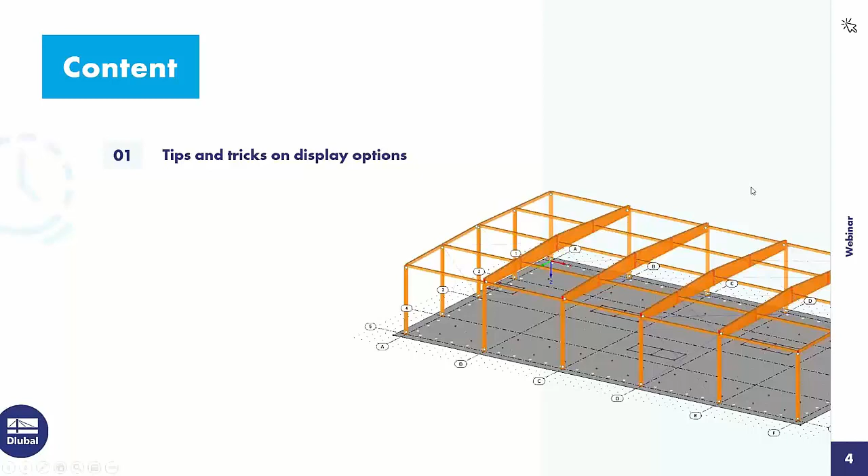To the agenda today, I will introduce some tips and tricks on display options, also on the printout report, also basic information. I do a single and multiple print of graphics to the printout report. And I show how to create a verifiable printout report.

We turn directly to the program. RFEM, that's a storage building made of timber and a reinforced concrete floor slab. Bracings from steel, you can see around. The model is completed, it's designed, the timber structure is designed, and also the concrete structure.

We can go through the load cases, self-weight with roof loads and single loads from racks, snow load, the imposed loads with loads from forklifts and from the racks. Wind in X direction, Y direction. Imperfections in X direction and Y direction.

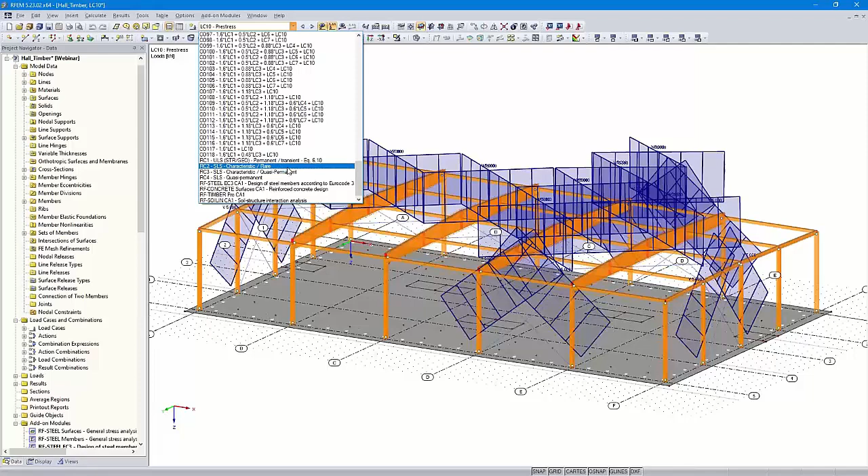Pre-stress. And then there are a lot of load combinations that are automatically created by the program. Also four result combinations, 1 for the ultimate limit state design, 3 for the serviceability limit state design, then the design of the steel structure. Those are only the bracings. You can see a design ratio of 55%.

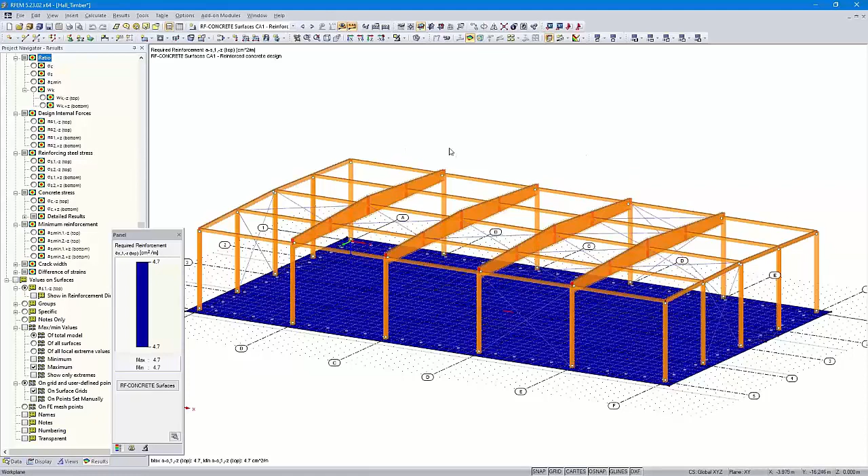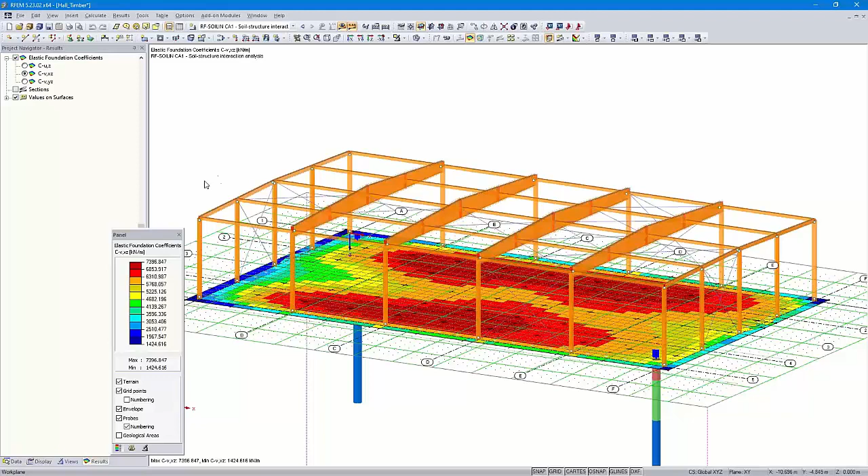Then the concrete results, also for the floor slab. Then the results of the timber design. Here you can see a design ratio of 94%. That's in the horizontal beam here, the maximum design ratio. Then I used RF-SOILIN to determine the elastic foundation coefficients. But we want to start with the member results. We want to print them in the printout report.

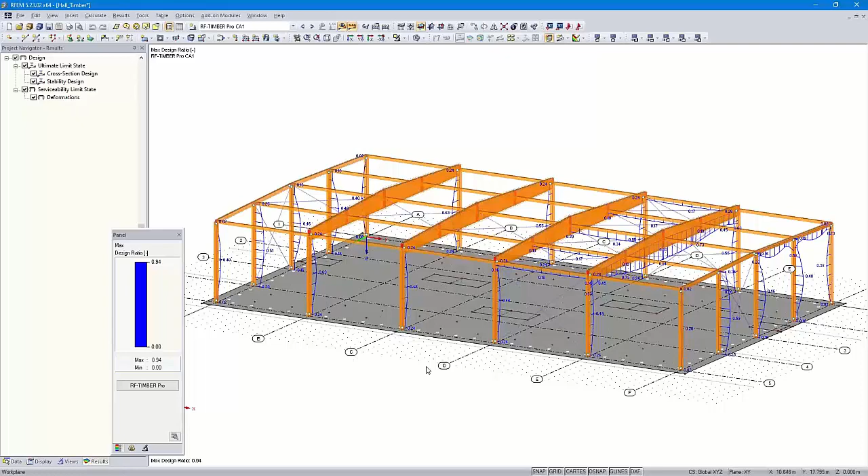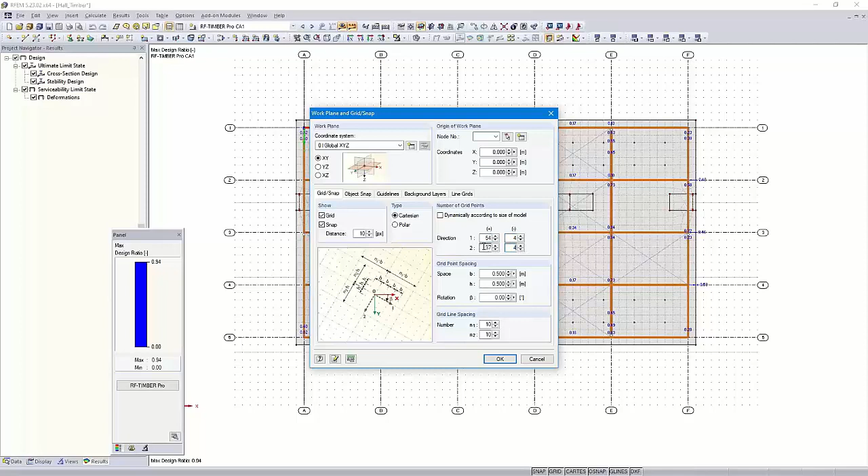But at first, I would like to move the axis designations closer to the model. How to do that, I can show you maybe in the top view. We go here with a right click in the grid options, edit. And then here is checked dynamically according to size of model. We uncheck it and then I subtract here 5. Okay, and then you can see the axis designations are

closer to the model. Okay, you can also hide the axis in the display navigator under here, guide objects, and then you can uncheck the guidelines and the axis would be hidden, but we would like to show them and document them.

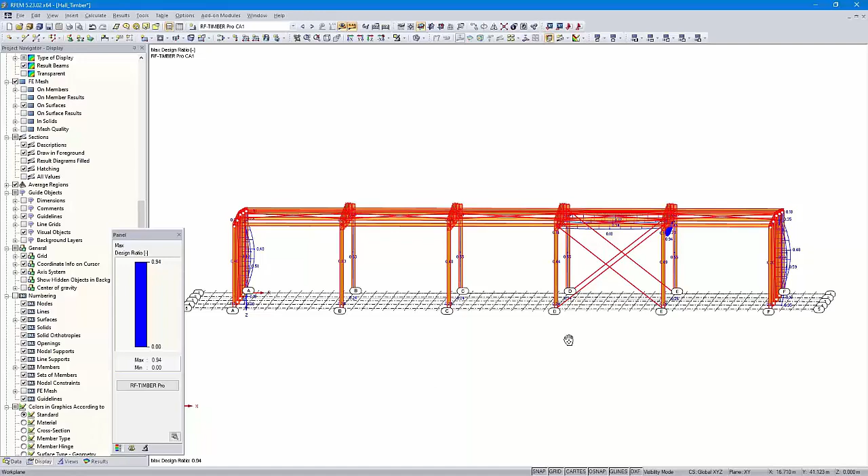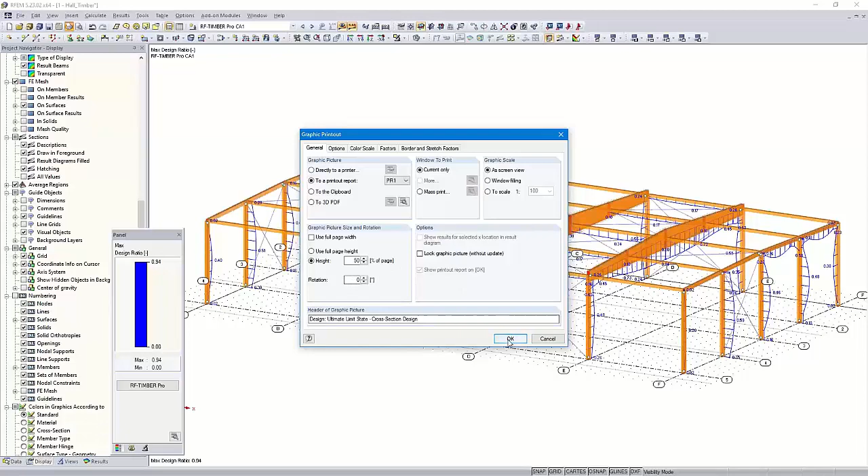Okay, then I make only the timber structure and the steel structure visible with that option, visibility by selected objects, and the concrete floor slab is hidden. Okay, let's print that graphic in the printout report. Here above, print graphic to the printout report, the current only as screen view, that's the options I will use. Then the height, 50% of the page, no rotation, and I confirm that.

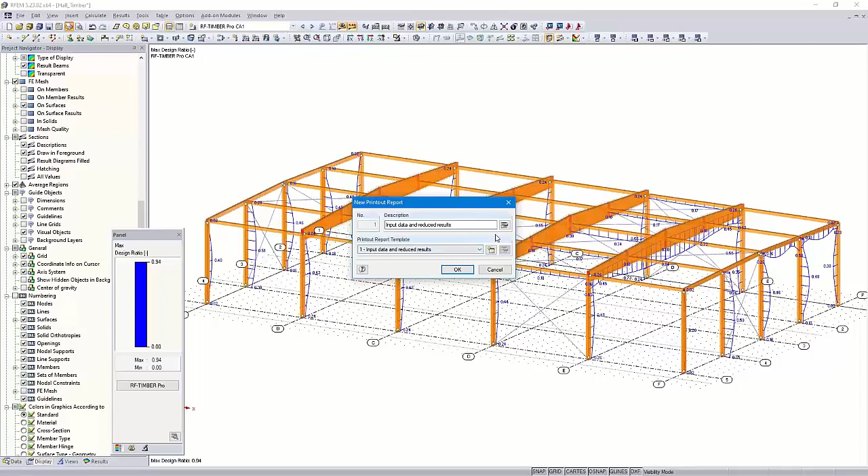So usually we would print the graphic with this option here for the printout report, input data and reduced results. But you can also use other options. But in that case, I would like to disable a lot of pages because we want to print the graphics firstly in an almost empty protocol or in a protocol with not so many pages, and therefore I disable here the RFEM data, the RF-STEEL data. I leave the concrete and timber data because we would like to print graphics in those chapters.

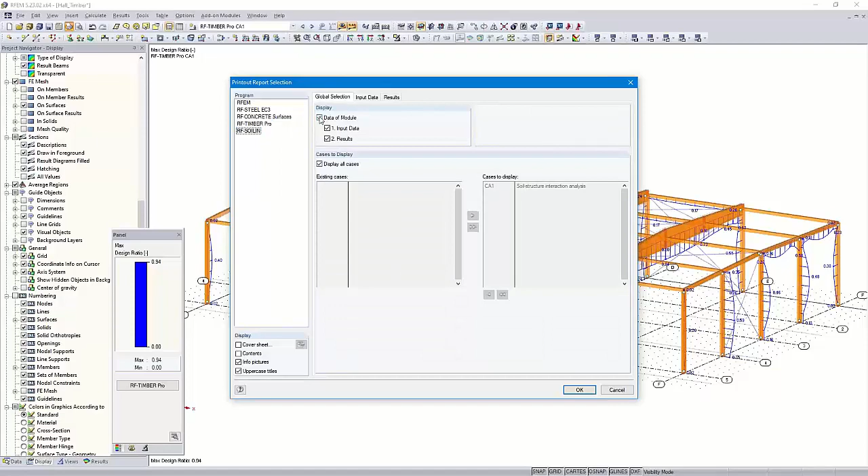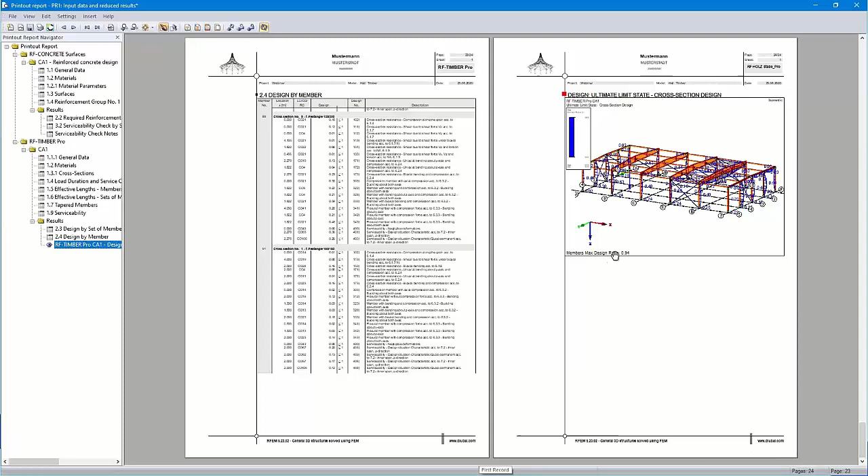Okay. So, and now a printout report with only few pages is created. At the end, we will have more than 170 pages. Now there are only 24, and the handling of the graphics is much better. Okay, but we can see that graphic is quite confusing, but we can modify that afterwards.

By right click, I can open the properties and I can rotate the graphic. At first I use the full page height and rotate the graphic 90 degrees. Okay, quite better, but I'm not satisfied with this graphic. I will change it here with right click and edit.

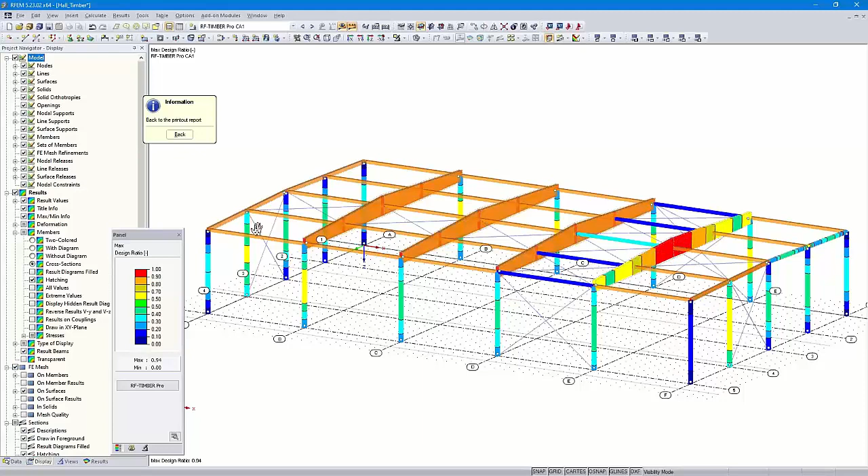I go back to RFEM, and then I can set in the display navigator under results, members, here the option two-colored, that's the current state. Then with diagram, it's colored here. Then without diagram, and cross sections. I think that's a good overview. You can see the maximum design ratio is in the horizontal beam here, and I can go back to the printout report.

Okay, that graphic is much better. We will use it, and we would like to print that graphic of the axis E separately in the printout report. We leave the printout report with saving that graphic.

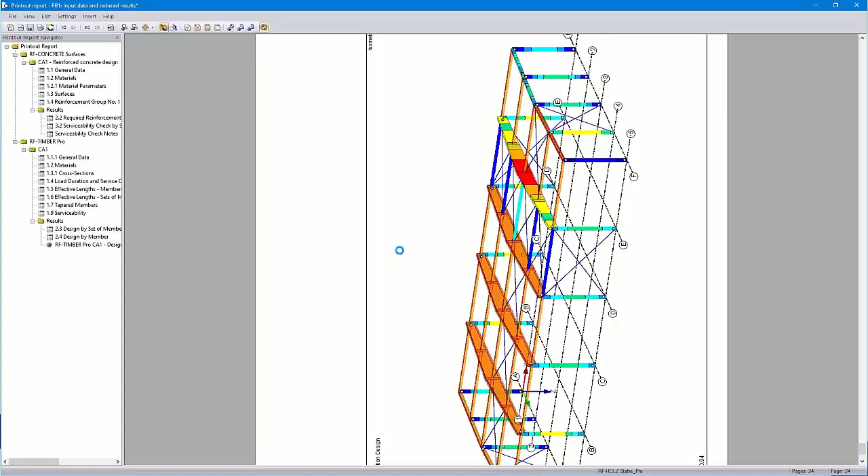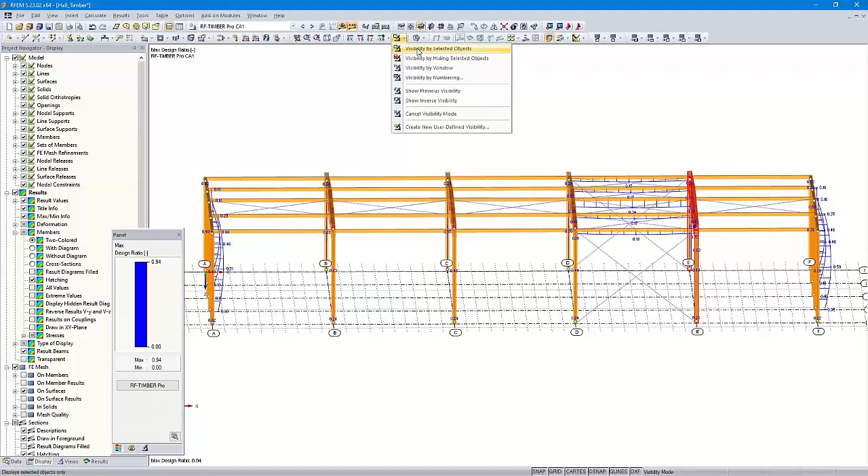Then I create a new visibility. I use this time this option here. It's the same as when I click on the right mouse key, visibility by selected objects. I use the wireframe display model,

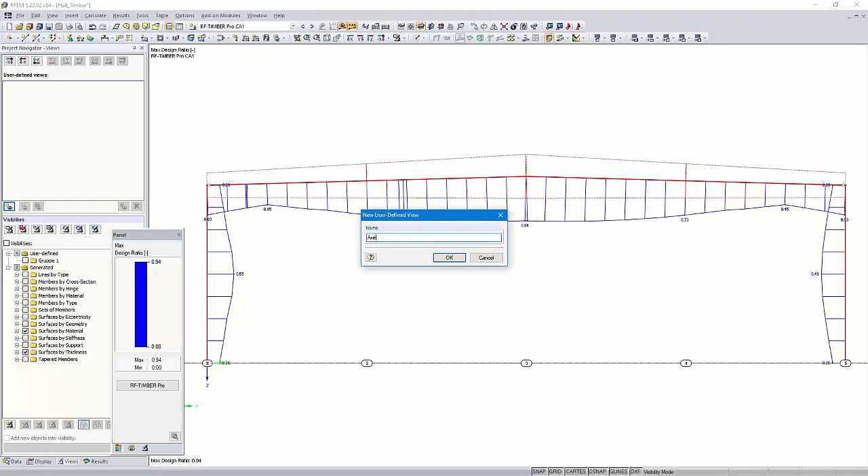and we can create a view, for example, here, create new user-defined view. I can call it axis E. Okay, and you can go back easily later to this graphic.

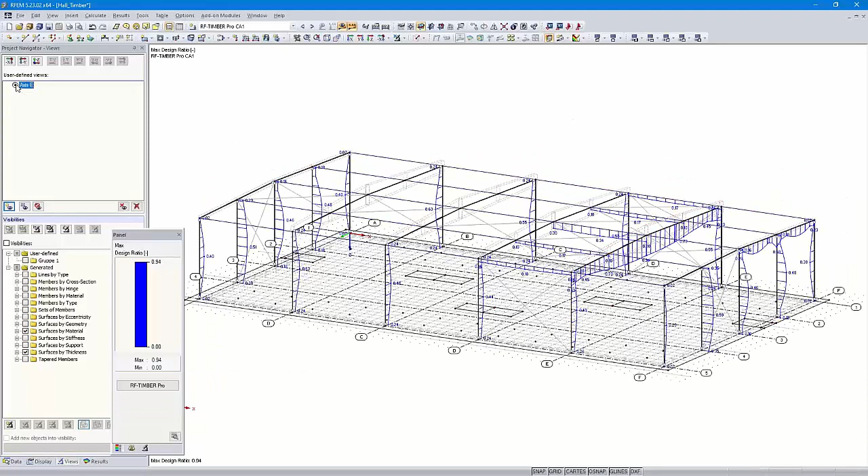I can show you. I cancel the visibility mode. For example, this view, and I click here to axis E and come back to this graphic. Okay, here you can see the 94% design ratio. We print that graphic. That's quite easy now.

So now also that graphic is created. Yeah, it's quite sufficient. I could make the panel smaller here with properties. I can use a color scale width of 20%. Okay. Okay, that looks better. I could move that to the right side a little bit, but I don't do that.

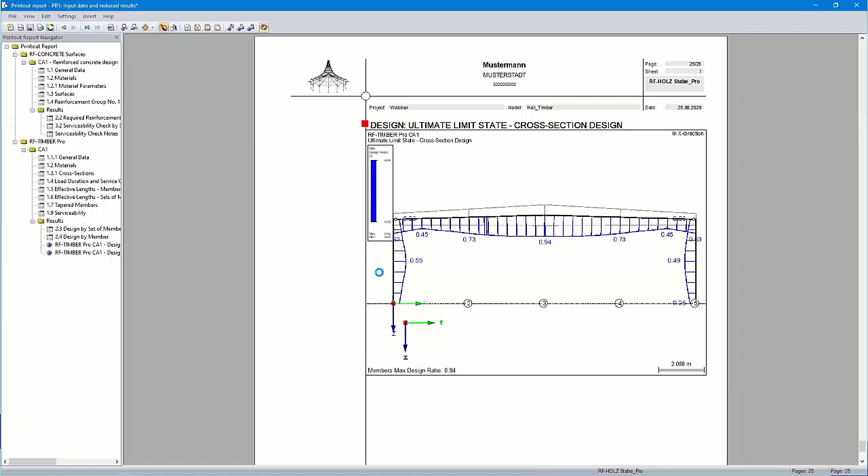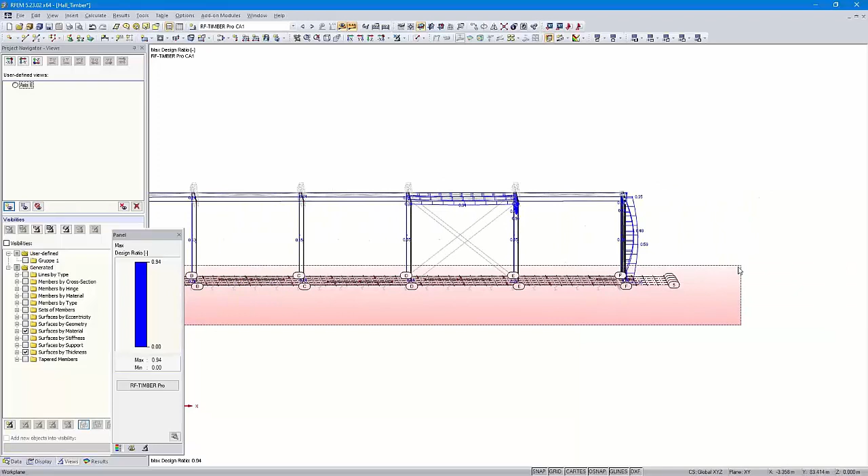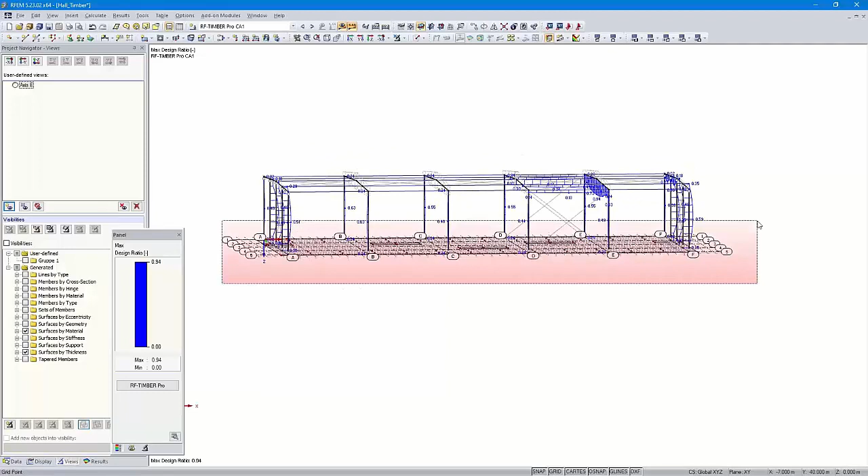We leave the protocol with saving the graphics. And then we print the reinforcement results. Okay. I choose only the concrete floor slab in the view. Just a moment. Okay. So, a view in Z direction.

A small tip: when you zoom in and out in a graphic with the mouse wheel, you can see steps. If you want to zoom in and out without steps, you can press the Shift key and the middle mouse key, and then move the mouse back and forward, and you can zoom in and zoom out continuously. Okay, just a small tip.

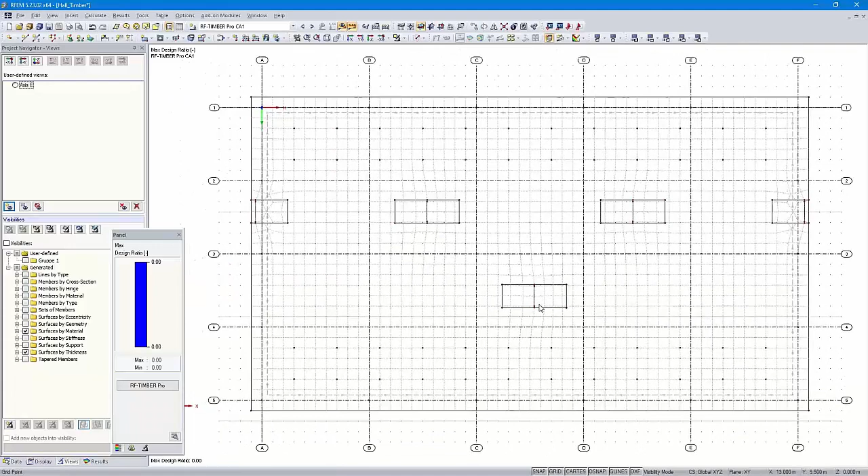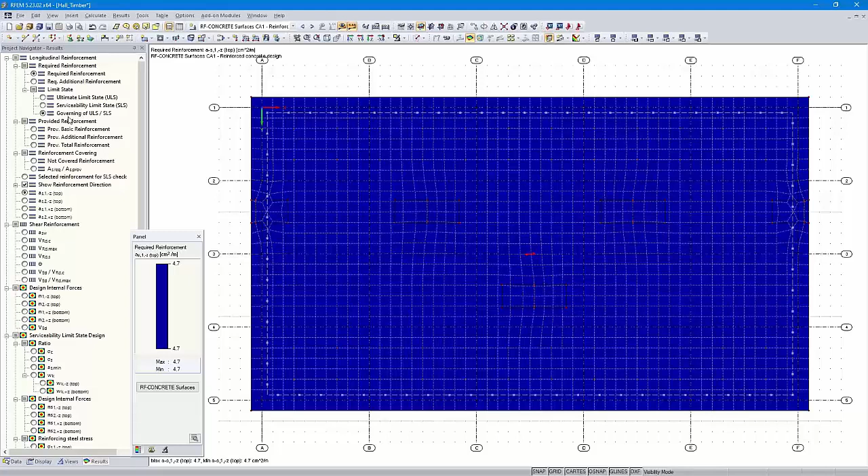Then we go to concrete surfaces and the results. Those are the required results governing of ultimate limit state and serviceability limit state. You can see there are almost the same values in the concrete floor slab because of the restrained design.

I use in this webinar the graphic of the ultimate limit state design. The graphic has more different values. You can see here the values between 0 and 2.7 and 0 and 2.8. Those graphics are more informative. Okay, I could print that graphic. That would be absolutely sufficient.

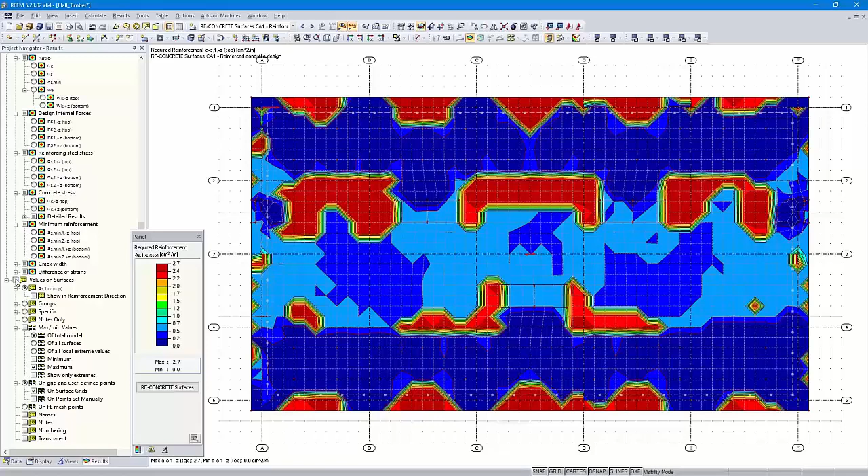But I would like to do a task that is more difficult. I would like to print a graphic with all values in all grid points. I check here values on surfaces, on grid and user-defined points. And when I have got here all values, I can use here not the ISO bands, but the ISO lines.

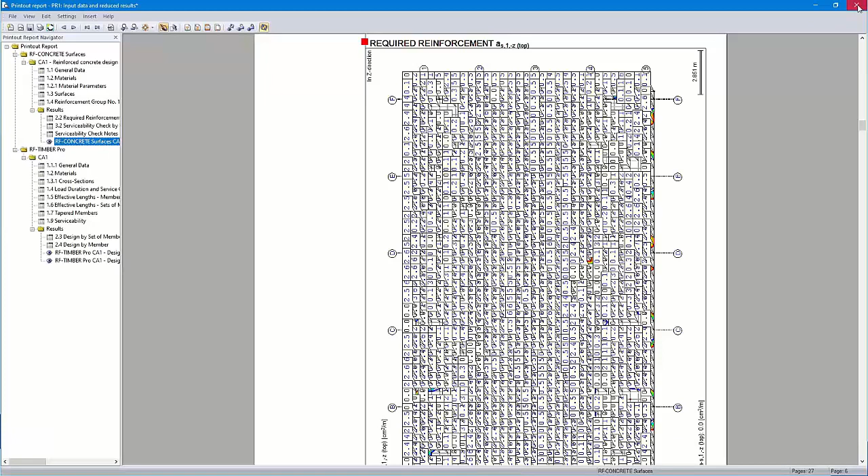And then I test the print. I print the graphic. I use the full page height and rotate it 90 degrees, and we will see how it looks. Now we can see the values are too large. The graphic is quite confusing, and we leave the protocol without saving.

By right-click at one value, we can open the display properties, and we are in the right place here, result values on surfaces. We can change the settings here separately for the screen and the printout report, but we can also use identical settings for both. We change only the setting for the printout report.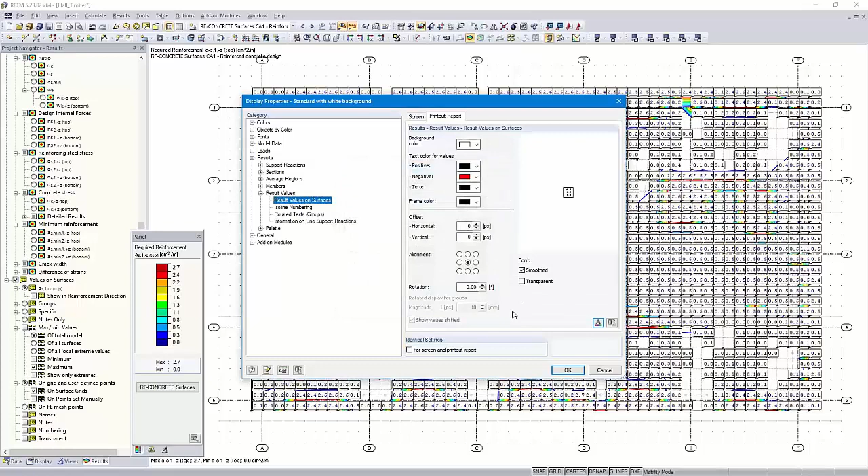I use here for the values the black color. Then I delete the arrow here. Then I move the values in the middle of the grid point, and I change the font size to 4. That's in German because my Windows is in German, but it doesn't matter. So, okay.

And then we print it again. Same settings. And just a moment, and then we will see that it looks now much better.

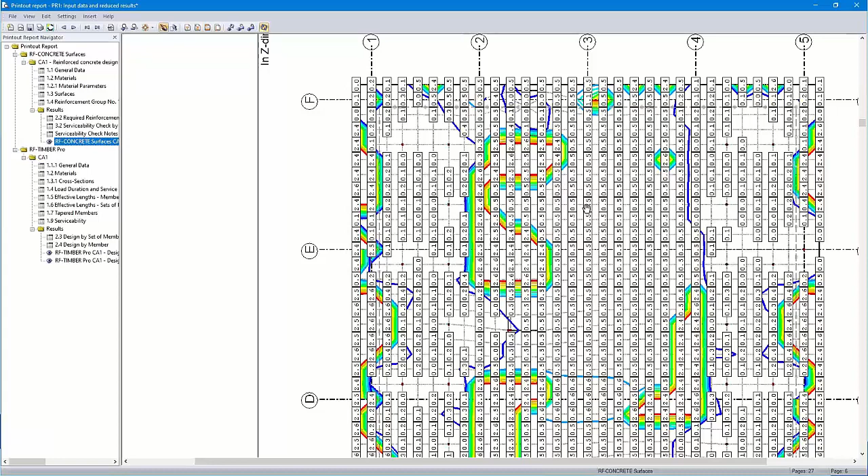Yeah, now we can read all the values here. At least for a PDF print, it would be absolutely okay. Then we leave the printout report because I would like to show you a mass print only for 4 pages for the 2 directions here, and for the top and the bottom, meaning the reinforcement.

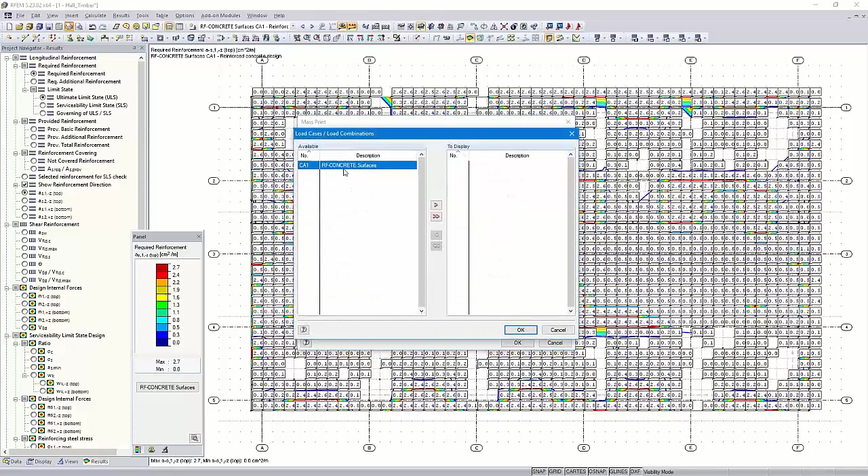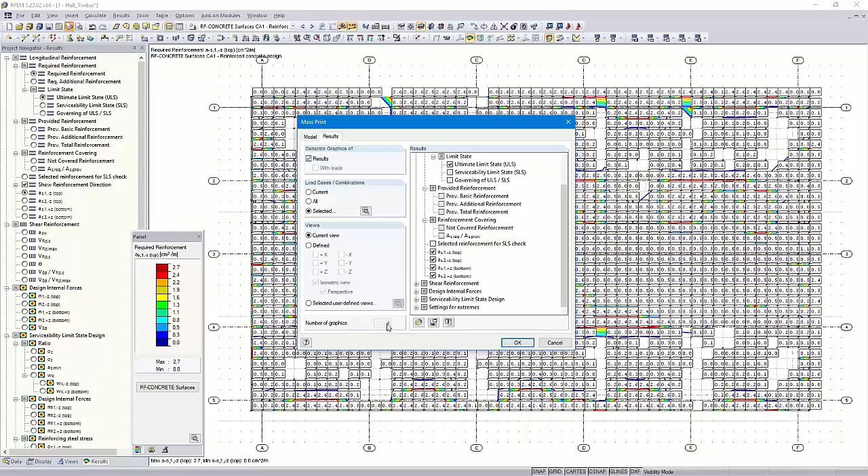I go here to print again and choose mass print. I change the mass print settings and I select the concrete surfaces, module data, choose ultimate limit state design and AS1, AS2 for the top and both for the bottom. I could also add other graphics, but for this example, 4 pages or 4 graphics are sufficient. You can do that the same way if you want to print more graphics.

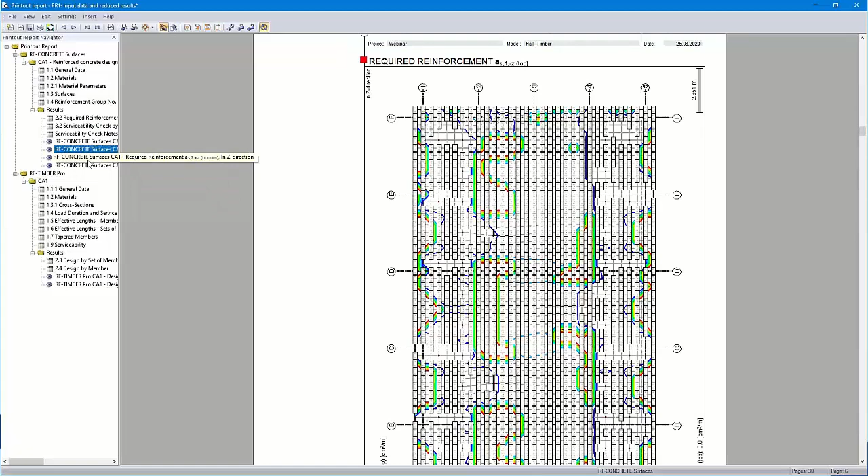The mass print works for member graphics or graphics with member results as well, but I would like to show you the function for the surface results. Okay, just a moment, and then all graphics are visible. I click our graphics here. You can see it's okay.

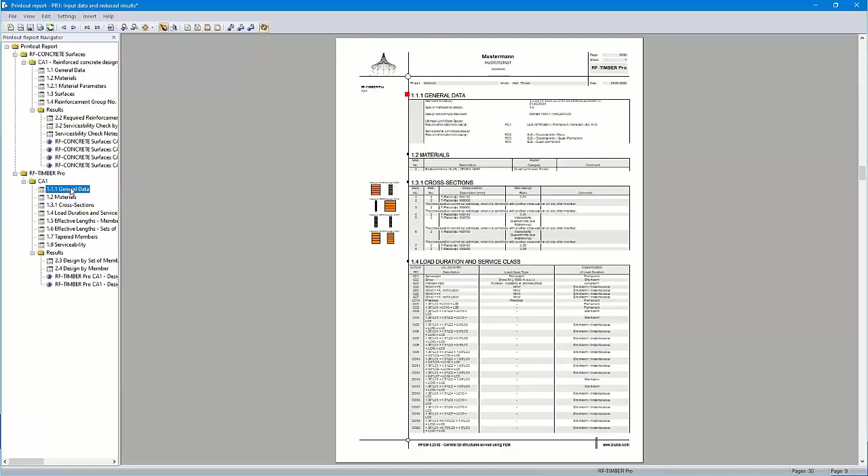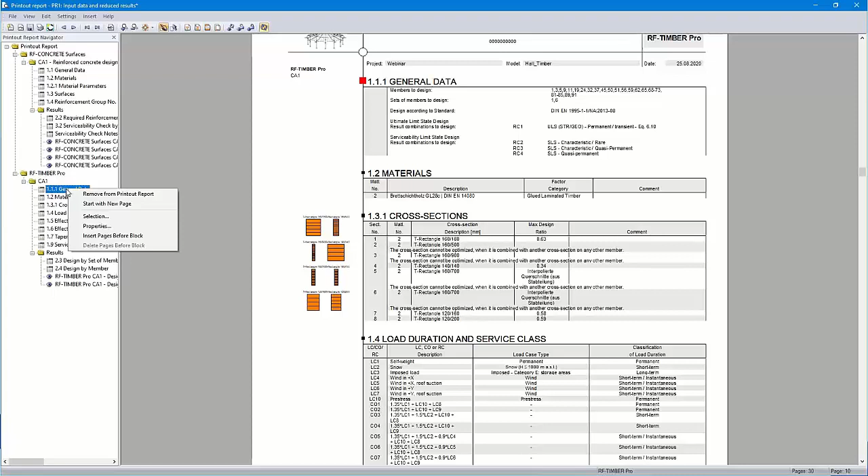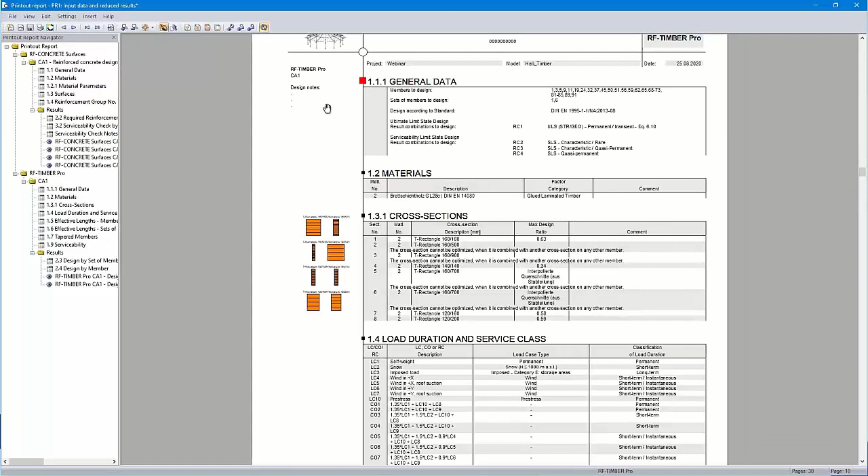Okay, a small tip. For example, if you want to add comments, etc., here in the left column, you can click with the right mouse, then properties, and you can add text. For example, design notes. Just an example. Here you can see it. Just a small tip.

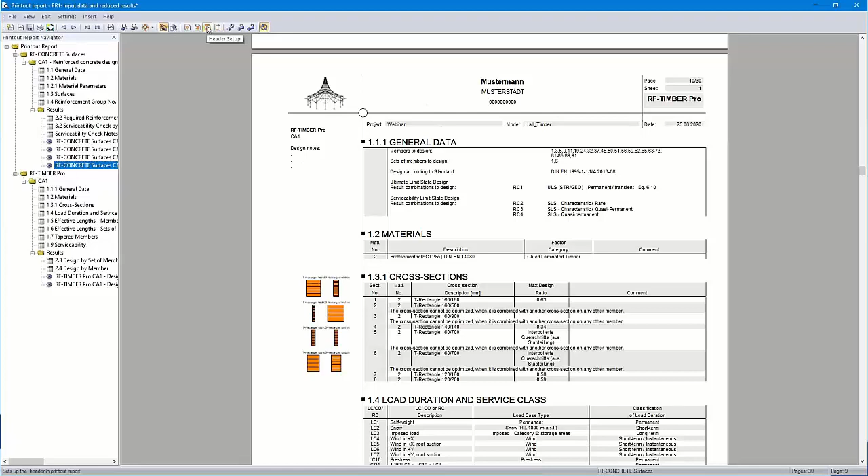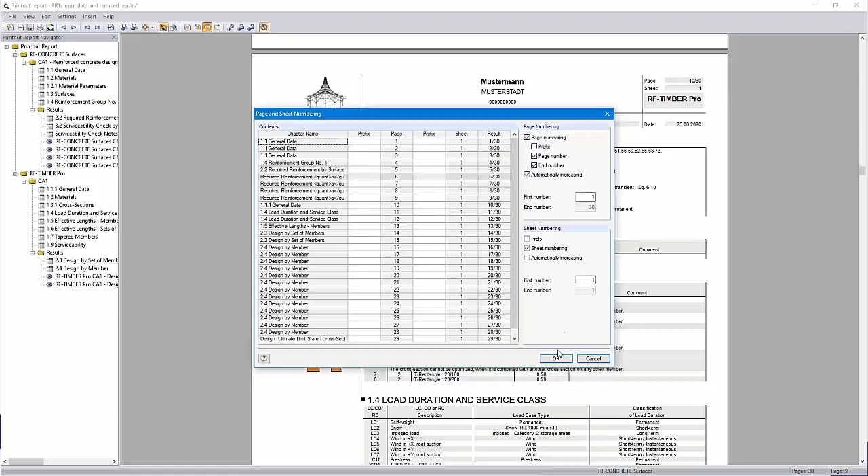Okay, then some basics. For example, we can create a header by clicking here, header setup. We can open the library and we can create a new header. I already created a Dlubal header with the name of our company, the address and the logo. You can change the first number of the protocol, for example. Here in the settings, you can add prefixes, etc. So the header should be okay now.

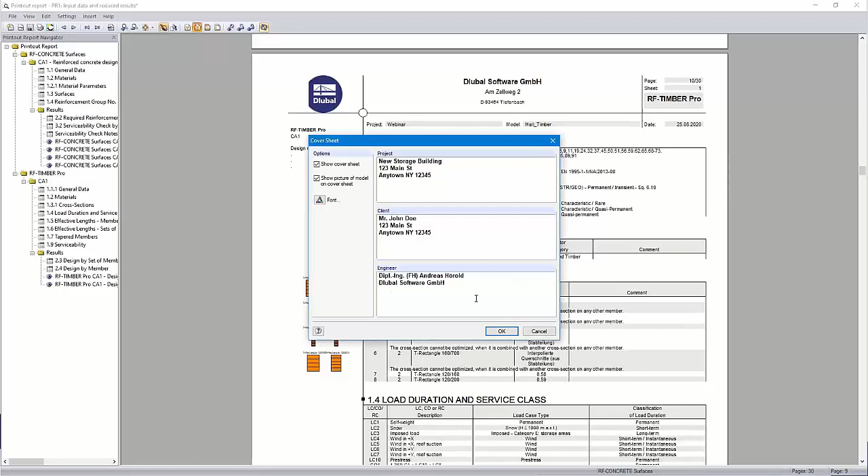Yes, okay. Then we create a cover sheet, here with cover setup. You can also show the picture of the model automatically. I can add some text. I prepared the text. It's only fictive text, but we would like to do the printout report complete. Okay. That's the cover. You can see that doesn't take much time. We can go to the next point.

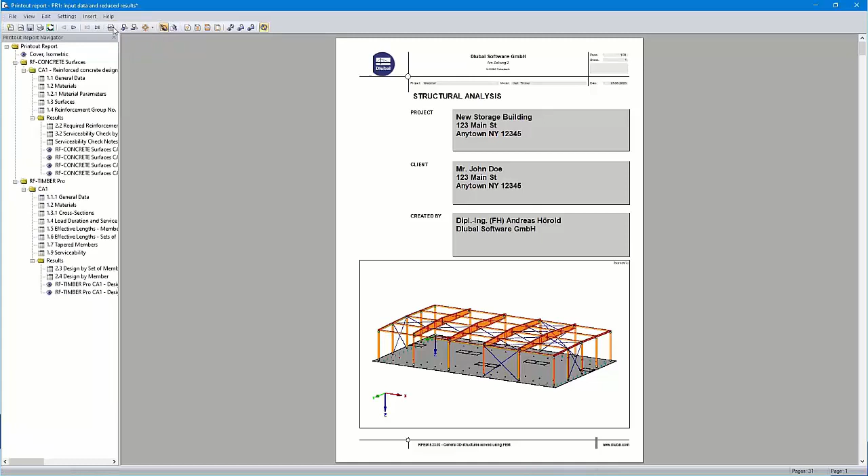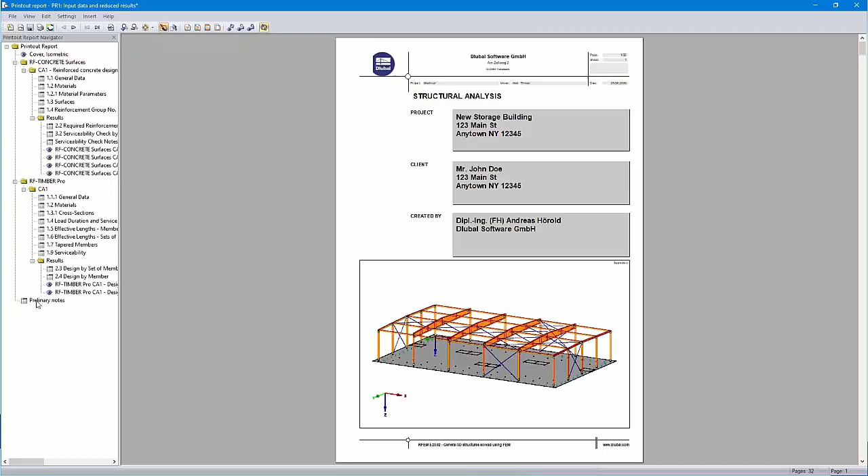You can insert text blocks, text files, images. Now I will add a text block, here the preliminary notes. I have also prepared some dummy text. Only the first sentence is correct, the rest is dummy text. It will be added at the end of the protocol, but we can move it to the right place later.

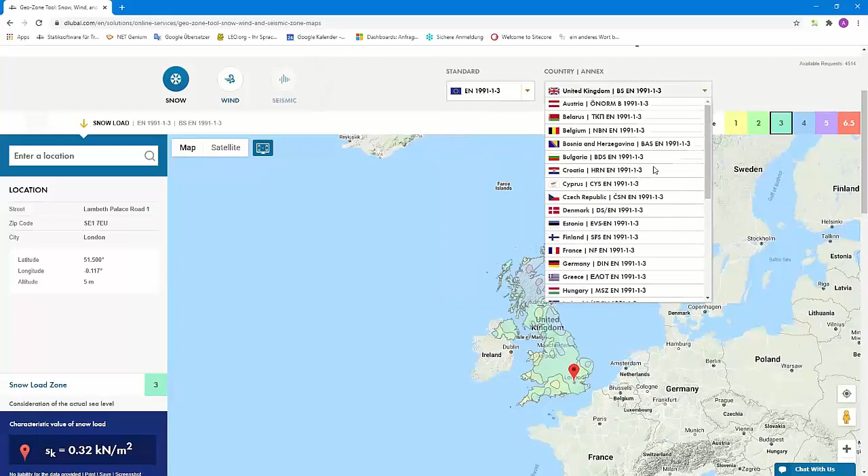I will add an image from a clipboard. I go to our website, and here under solutions, you can find the online services, for example, the GeoZone tool, cross-section properties, the glossary. I think some of you know that tool already. It's free. We have a lot of international standards here, also the Eurocode with the national annexes. I use Germany. I entered the address of our office in Leipzig.

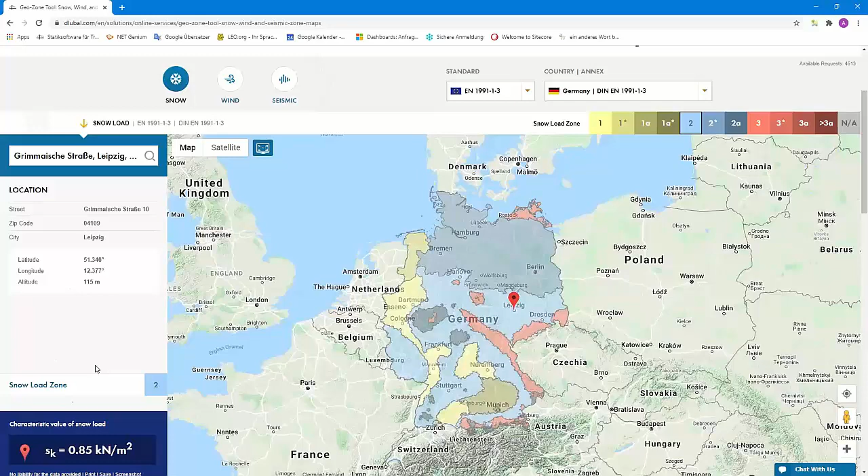Okay. And we can see snow load zone 2 and the characteristic value of the snow load. And we can create a screenshot. Then we can open it with an image tool. For me, that is Snagit. I can copy it to the clipboard and then insert it into the protocol. I call it snow load zone. And you could do the same with the wind loads, earthquake load zones, and so on. Also other graphics.

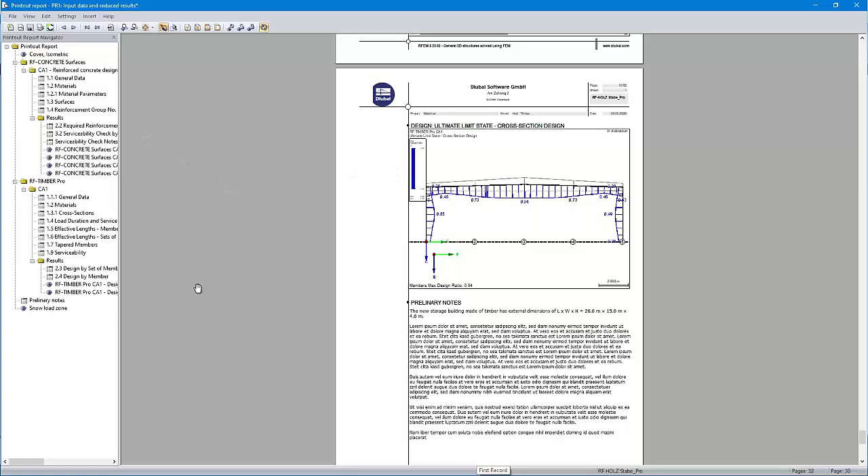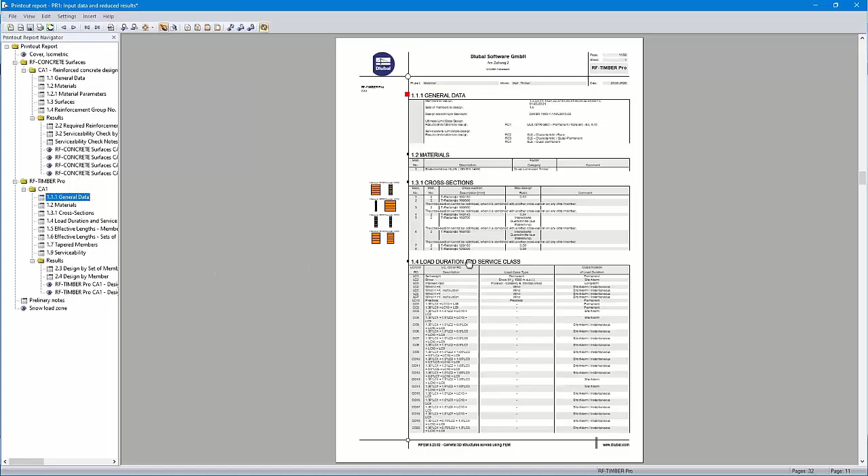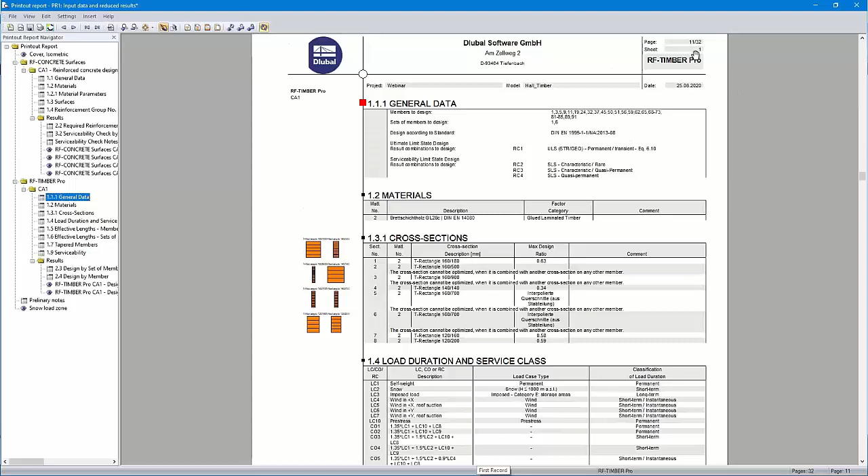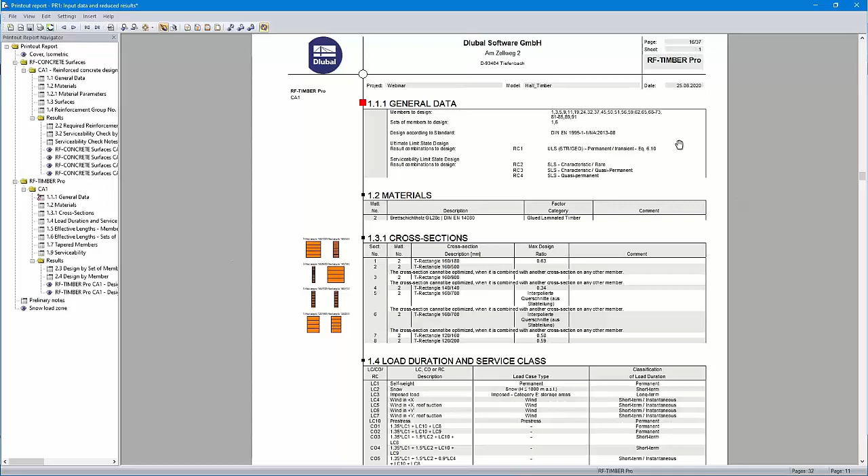Some other tip now again. You can add empty pages here. For example, you would like to add pages from external programs, etc. in your protocol. And then you see here, that is page number 11. And by right click I can insert pages before the block. I call it test and 5 pages. Okay. And then you can see it's page 16 and this page is page 10.

Oh. But I will delete them. Okay. Just for info. Now it's page 11 again.

And the next step is to select the topics. First I check contents. We would like to show the content. Then the RFEM data. I then choose the steel data. Those are already in the protocol. Okay. Now you can use the settings which you like. You can disable some content.

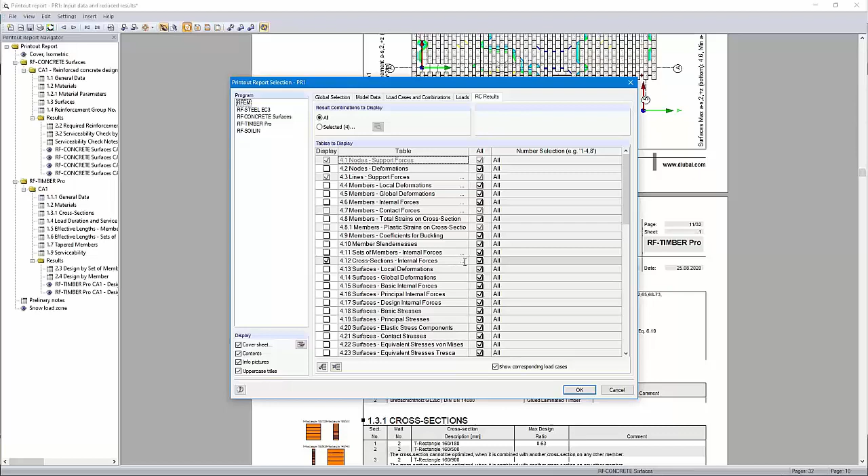For example, I will disable the results of the load cases and load combinations, and use other settings for the cross-section internal forces. I choose not the partition values, but the extreme values of the cross-sections. Okay. Therefore, the protocol will not have too many pages. Okay, then the whole protocol is created in a few seconds.

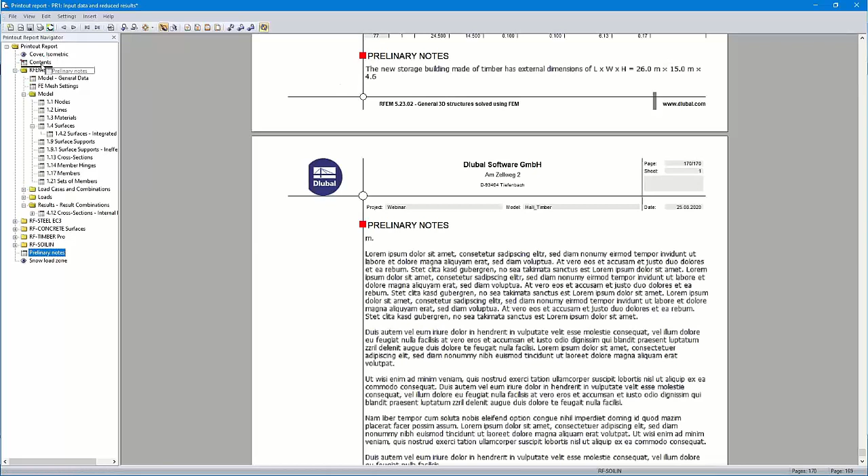So you can see all the module data. I moved the preliminary notes to the beginning. Just a moment. You can see now we have 170 pages. So I move it behind the contents. Okay. Now our pages will be renumbered. It takes some time. And I moved this snow load graphic into that chapter. I have to wait some seconds. Okay.

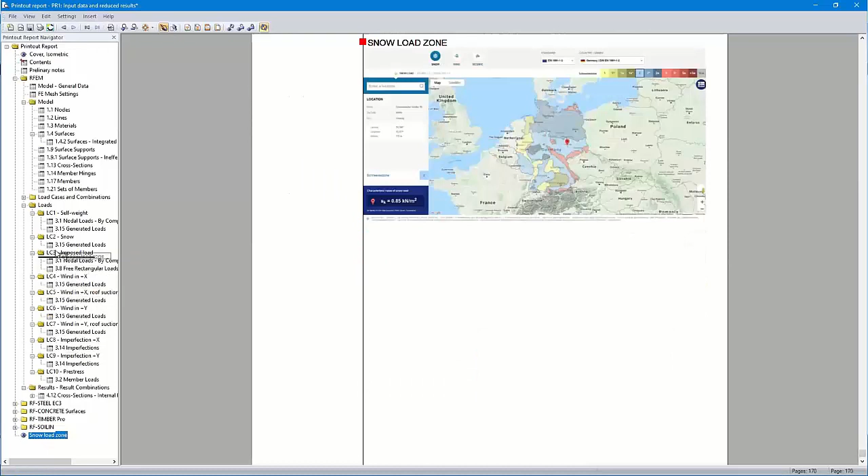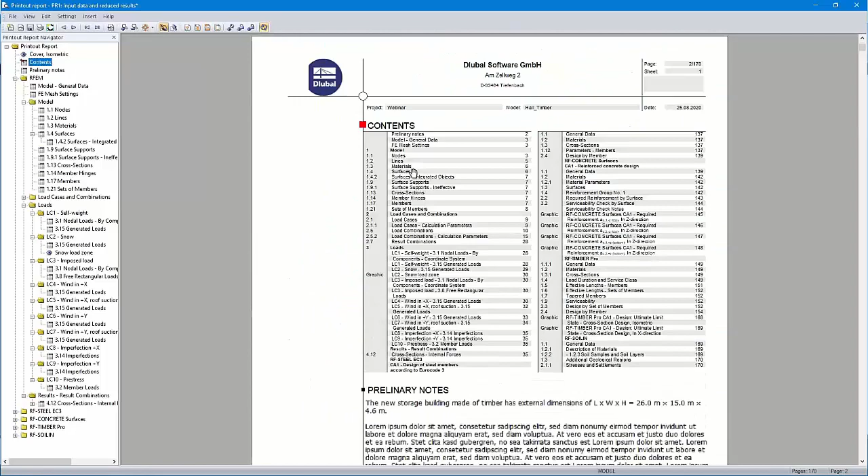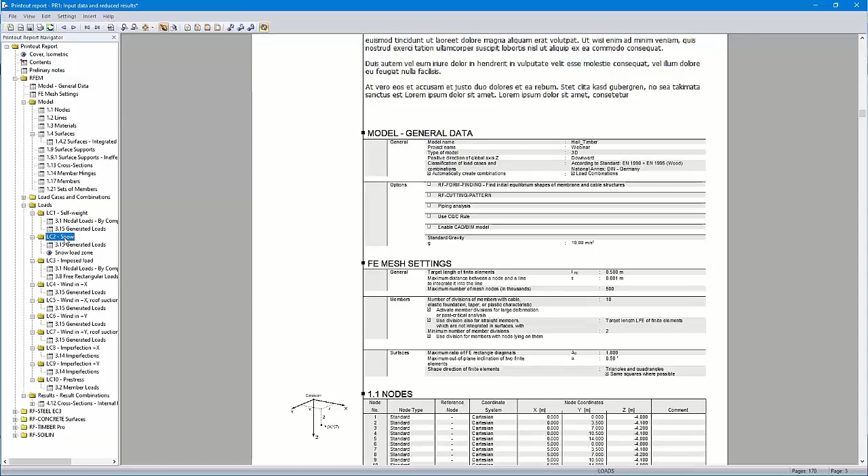So we jump to the preliminary notes. The cover sheet, the contents, preliminary notes, and then the RFEM data are shown. Here, snow, the generated snow loads, and the graphic from the Dlubal homepage.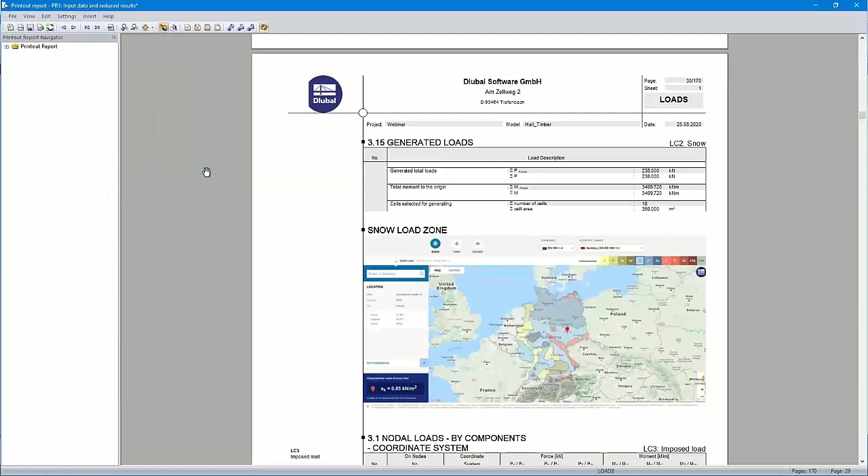Then it's possible to translate the protocol. There are 13 languages available: German, French, Italian, Russian, also Chinese, etc. By clicking here to French, the whole protocol will be translated in a few seconds. You can see here the text is already in French.

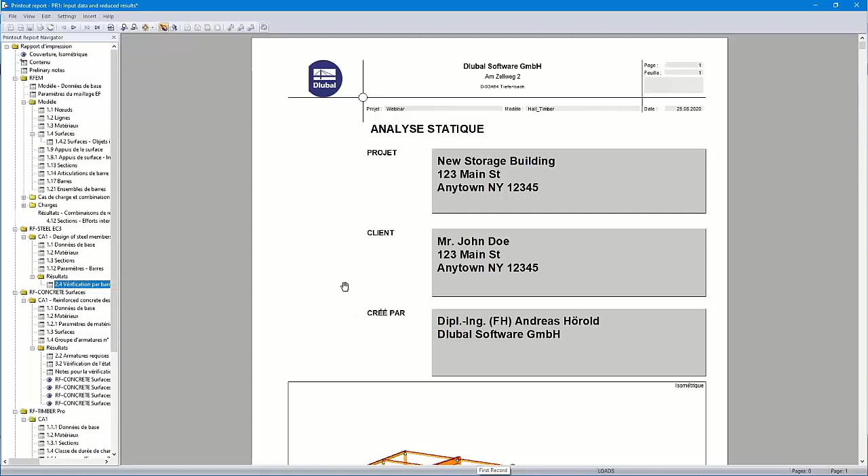Okay, we have to wait some seconds. I will show you some other parts. Here, the whole protocol is now in French. We translate it back. Okay. That will take some time.

You can export the printout report to VC Master, for example. How to do that, I would like to show you with the help of a knowledge base article. Sandy Matula wrote this article, and she also did a short video where you can see how it works.

You can also print the printout report in a PDF, etc. on my printer. I can show you file, for example, export to PDF, export to RTF. That's a text file. I can print it directly to a printer, also to a PDF printer. I can start it. It would take some time. I cancel it. Okay, and show you the complete report instead.

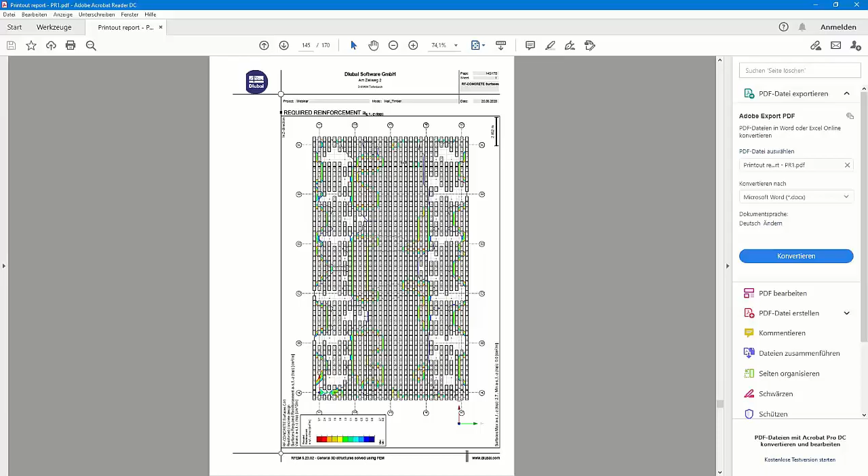That's the PDF. You can see the graphic here. It looks quite good. That's the whole printout report as a PDF file.

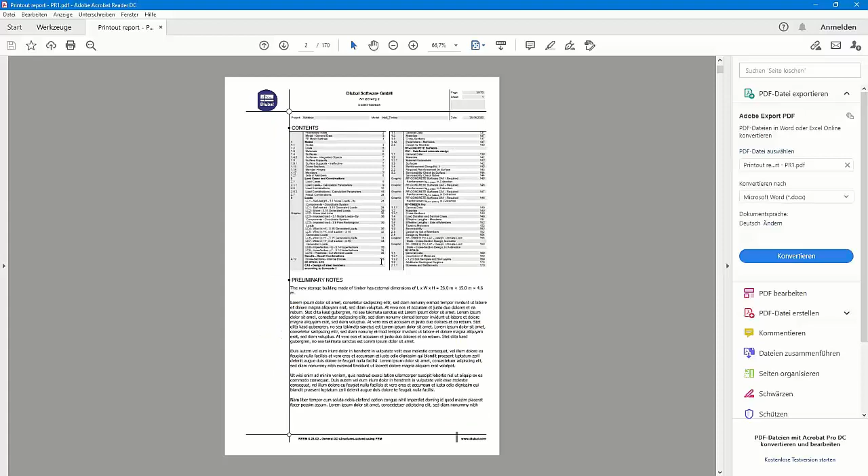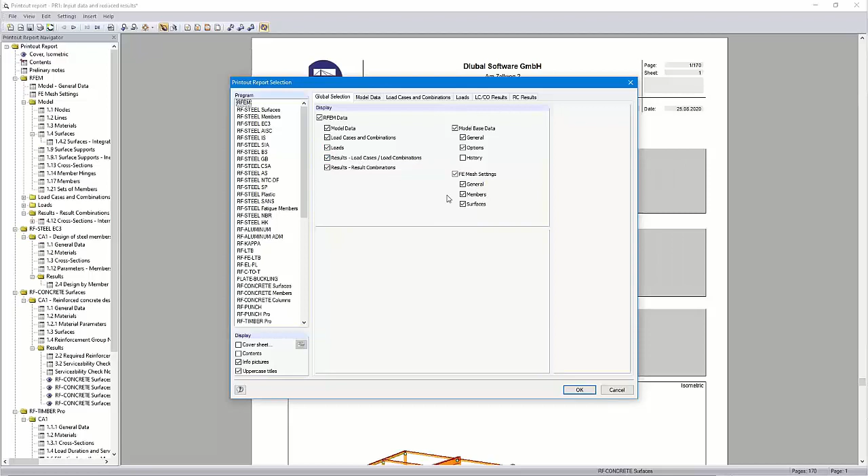Okay, another tip, you can save printout report templates. For example, you can use those settings here for a new template. Then you need to choose here new from current printout report, and then you can enter here a name and save it. You can also save a new template. You can here check and uncheck the chapters that you want to display. Okay.

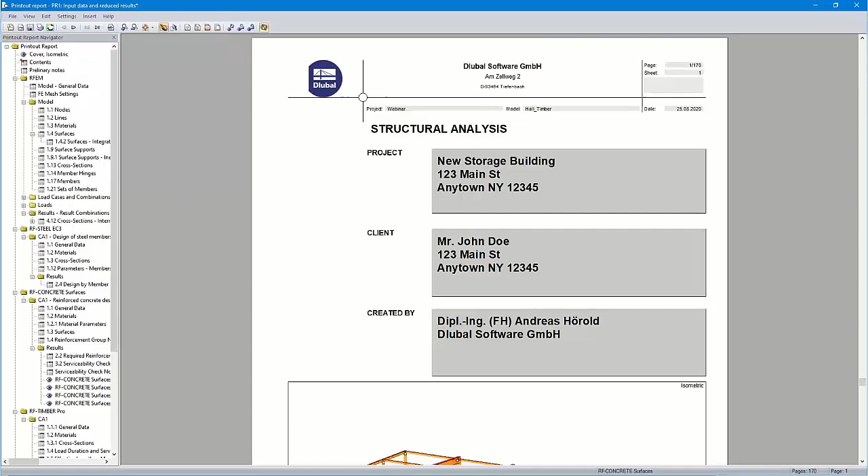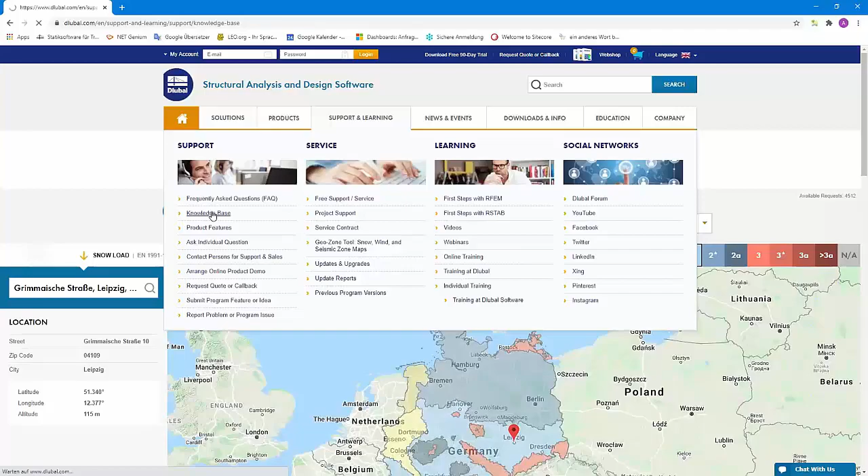As promised, I show you the article about VC Master. Here under Support and Learning, you can find a lot of FAQs and knowledge base articles. I open the knowledge base database. You can see a lot of articles. I use the full text search. VC Master, I searched already in the test for it.

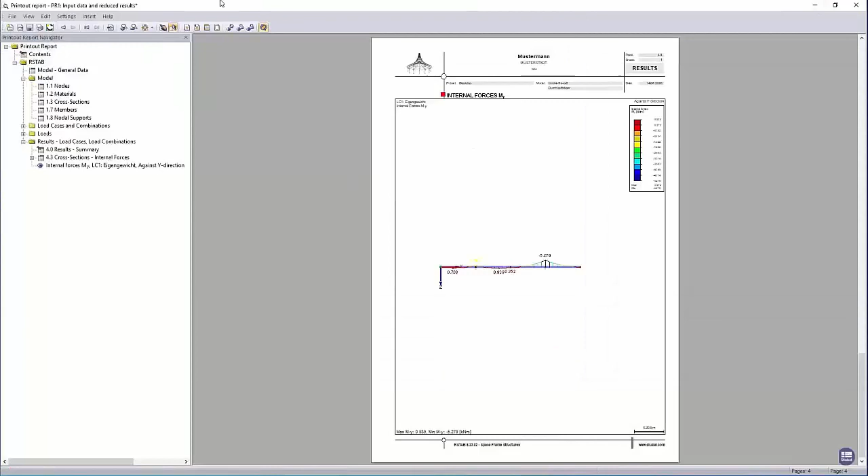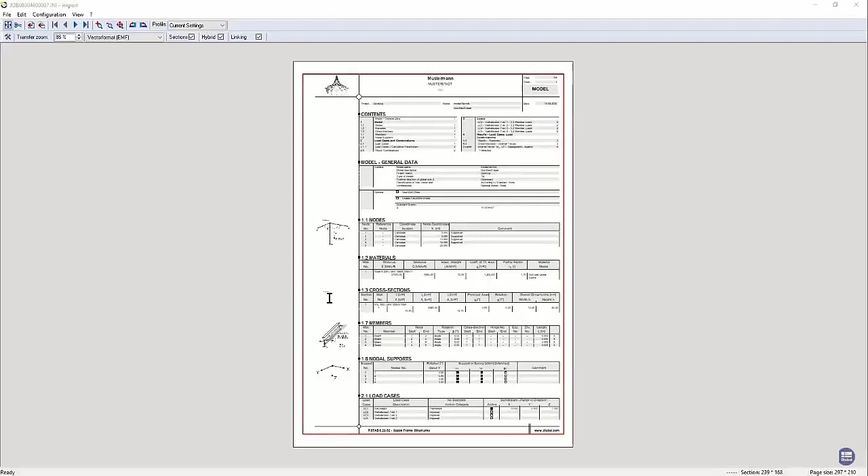Then you can click at the top to VCmaster, and then you can choose the pages that you want to export. This report has only 4 pages, and all pages are transferred in some seconds. Yeah, okay.

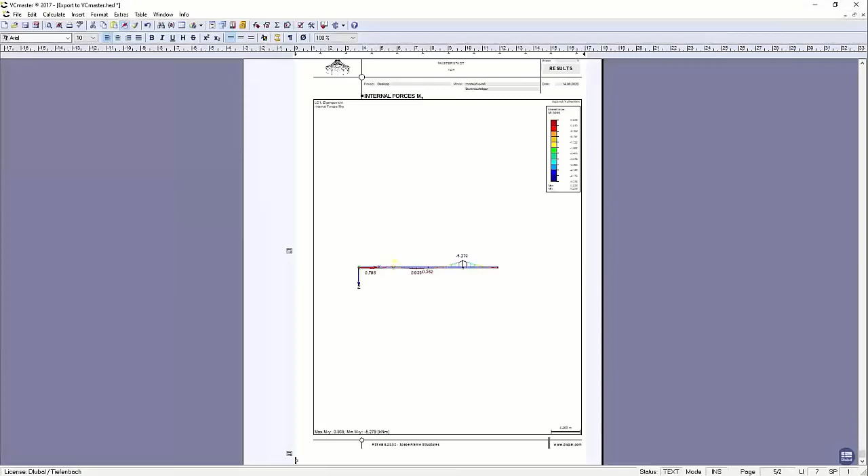You can also add to this VCmaster tool other printout reports, also from other programs. Yeah, it's quite easy to handle. Just test it. Okay.

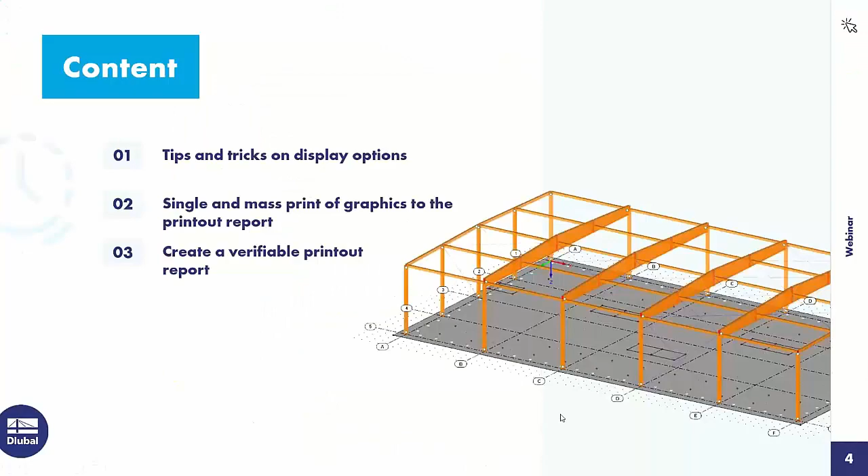Then I go back to the PowerPoint presentation. I would like to introduce you to some free online services. I already showed the Geo-Zone tool with a lot of codes where you can determine the snow, wind, and seismic load zones, etc. Then the cross-section properties. It's also a free online tool for standardized sections, and you can also define your own parameterized cross-sections and then calculate the properties.

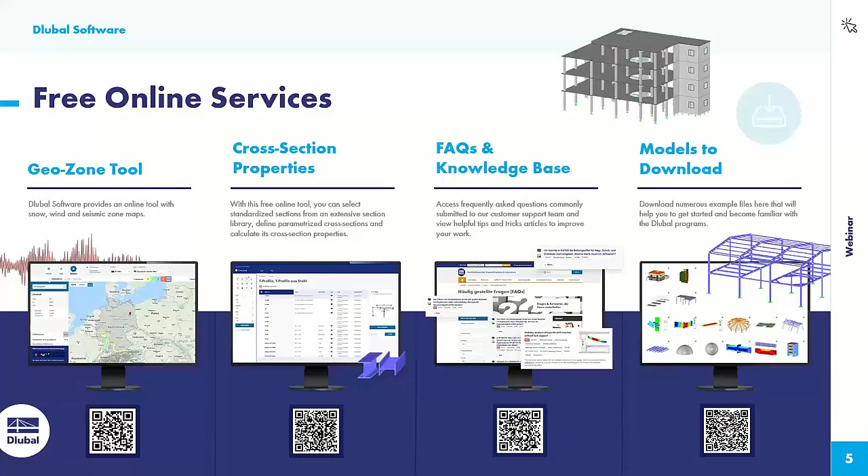I also already showed the FAQs and the knowledge base. A lot of valuable, informative stuff. Then you can download models from our website. The Dlubal engineers created them. You can find there also the model of today's webinar, also of our webinars. Then I've got our YouTube channel with the webinars and the videos, all for free, of course.